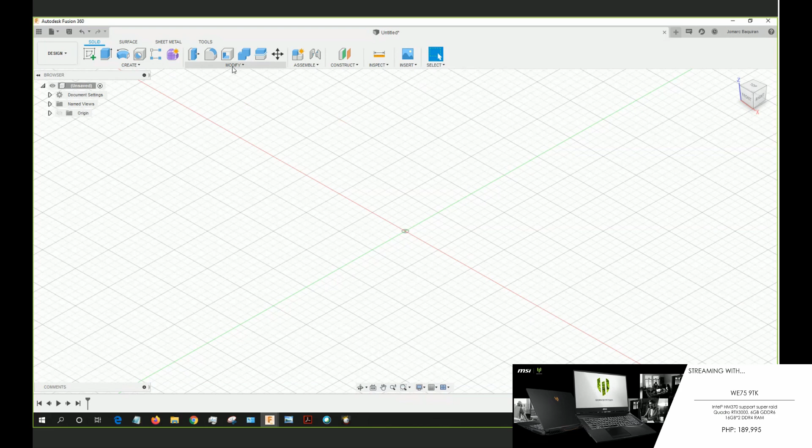You can easily 3D print items. We have a lot of users making products for our frontliners. We want you to level up and use your knowledge in Fusion 360 to create something sustainable and helpful. Later we'll show you the works of our designers who created products for frontliners - someone made a mask filter.

Without further ado, let me open up Fusion 360. In comparison to AutoCAD and other CAD packages, Fusion 360 is very easy to learn.

Ms. Nelsie, can you show them - let's start off by creating a simple sketch and discover how to navigate Fusion 360. Can you create a quick box by selecting R? Let's create a quick rectangle - R, the shortcut for rectangle is R. Can you extrude that quickly for me? That's it - in a matter of seconds, we have created a 3D model.

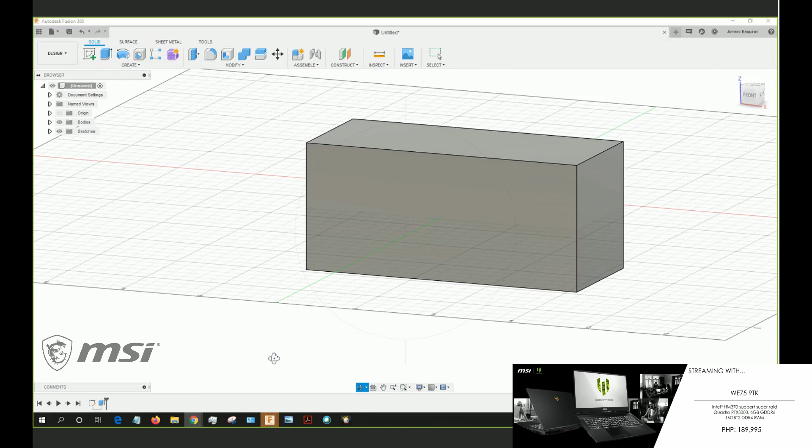Okay, how about orbiting? At the bottom of the screen you can see some commands there, but most important is speeding up your workflow using the shortcut command. So what's the keyboard shortcut for rotating a model or orbiting, Ms. Nelsie? It's holding Shift and your middle mouse to orbit.

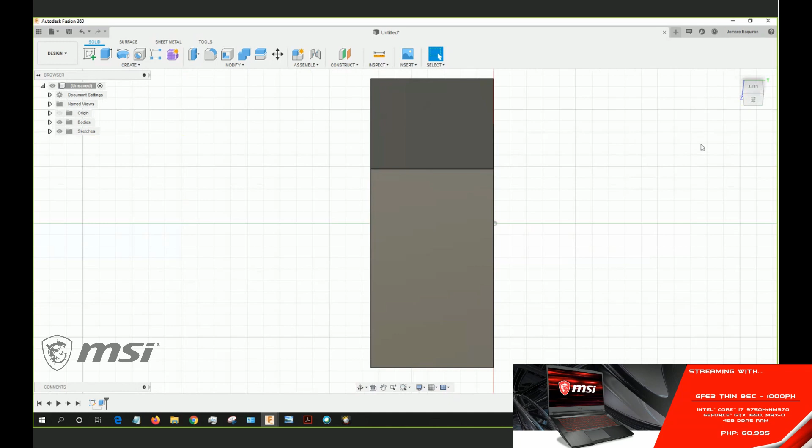So for example, can you zoom out, make the model very small, far from our view? To bring it back, you can select home view, and also you can zoom to extents by clicking your middle mouse twice. Double click your middle mouse to zoom extend.

Again, if you're familiar with AutoCAD, it's very much the same. So the navigation is very much the same with AutoCAD.

In addition, Fusion 360 you can also import, you can also reuse the DXF and DWG files from AutoCAD. So nothing is wasted. If you would like to migrate from AutoCAD going to Fusion 360, it's very easy. We're hoping later we can demonstrate how to bring in a DXF or DWG file.

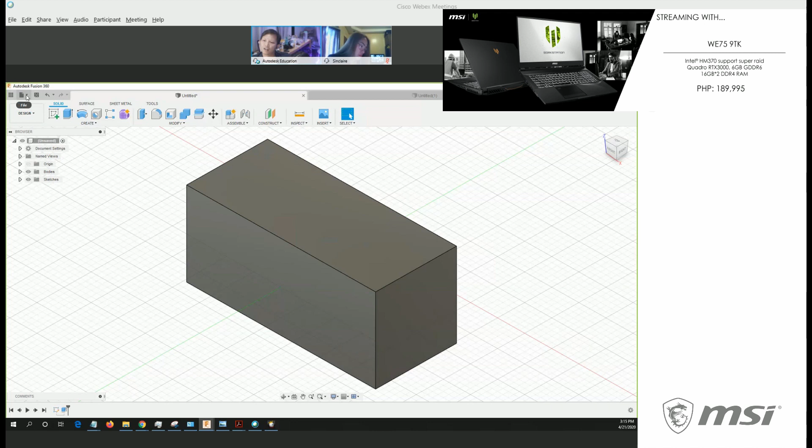So again, if I save this file, can you hit save or show them? Let me show you the data panel. This is where the version of our Windows Explorer in Fusion 360 is. So the data panel is the one that looks like a Rubik's Cube.

Okay, so notice as Ms. Nelsie hits Control S, let's name this as MSI-01. And I have already defined my target folder, or I can create a new folder. So let's create a new one, Ms. Nelsie, or head out.

So I can select cancel, go to home. This is one of the best practices of getting organized. Make it a habit to create your own new project. All of the items or folders you are seeing here, I can also access via my tablet or my mobile phone.

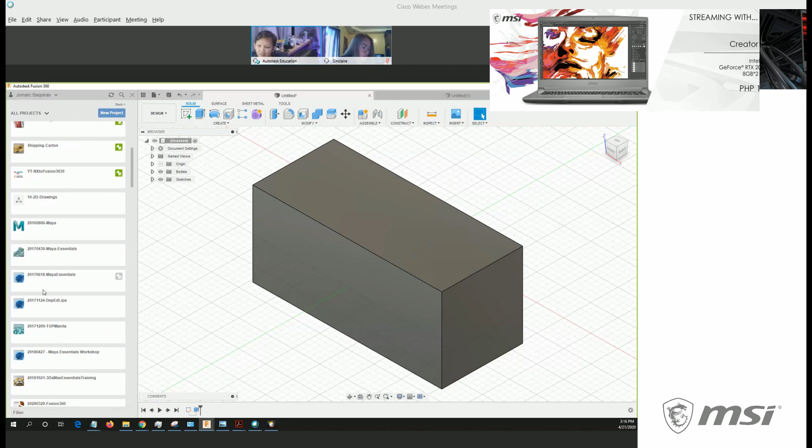That's one of the advantages of being connected with the cloud. So I have here many folders. Let's create our new folder. I'm going to select new project and name this MSI Philippines. Hit enter, and let's double left click on that folder, MSI Philippines, to enter.

In addition, I can work quickly with someone. For example, if we're planning to create a car or a vehicle, I can invite people. Under people, that's the gear icon. If I know your email and want you to join our new project, for example we're about to create a car, I can invite you here.

And we can collaborate together quickly. For example, I am assigned to create the wheels, you were assigned to create the body of the car, and another teammate is assigned to create the engine. That's one of the powerful things in terms of collaboration in Fusion 360. So you're not working in silos, you're working as a team, and it's very easy to invite everyone.

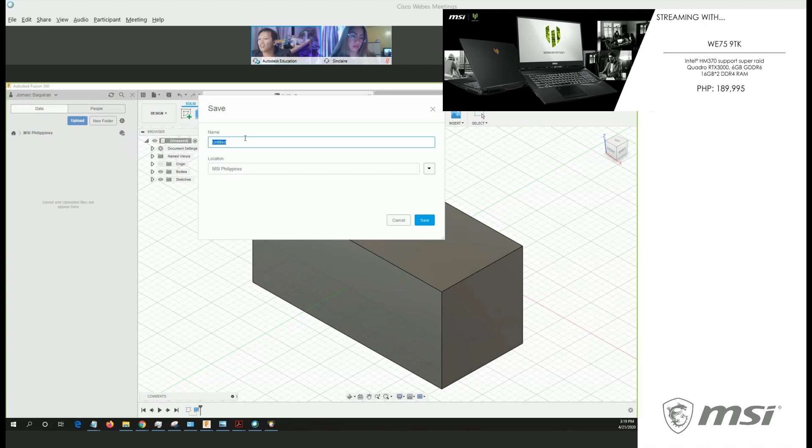Anyways, let's name that 01. Saving this, notice on our data panel. There, it updated on the left under MSI Philippines. There's the awesome rectangular block we made. Again, I can access that via the web, just in case I don't have Fusion 360 natively installed in my computer. So Fusion 360 is a very powerful tool. Let's hide the data panel. Shout out to Ms. Sinclaire, and hi to her baby.

Under design, workspace design, we have generative, just hover over it. This is one of the powerful features of generative design. Autodesk popularized generative design and they were the first, and everyone is following along.

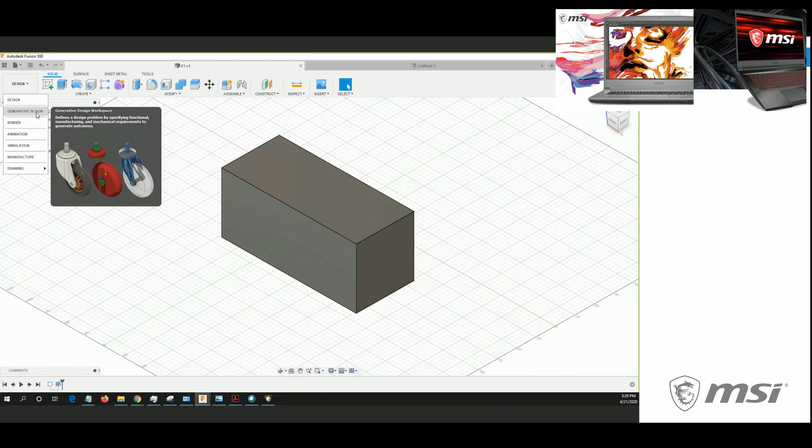With generative design, it's about harnessing the power of the cloud. As you can see here, the wheel of the cart, on the right side with generative design you will assign the stress points, and then automatically the power of the cloud, the servers, and Autodesk AI will quickly create a new model for you, taking into account the important stress points.

In addition, later under render, when you're using Fusion 360, you won't even need to use V-Ray. Later we'll show you the power of rendering, and the native render of Fusion 360 is also great.

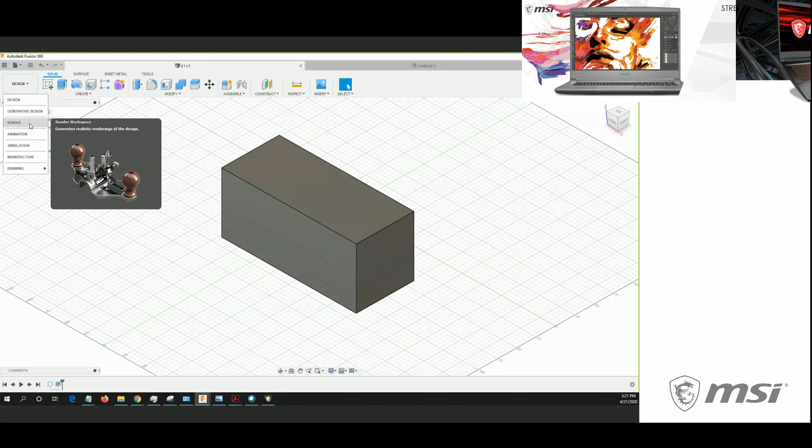In addition, you have two options. I can use the local processing power of my MSI laptop or desktop to render it locally. And again, because it's connected to the cloud, if your laptop or desktop is old and can't handle rendering something great, I can throw it to the cloud and Autodesk servers will make the render for you.

Moving forward, we have animation. So again, if you're planning to instruct the manufacturing side or the factories how to assemble your product, you can create animation.

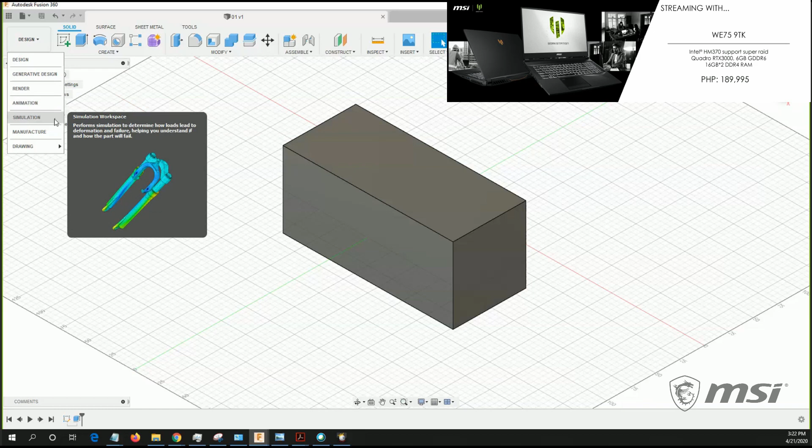Unlike other CAD packages where you have to purchase separately the simulation packages or the CAM, let's select simulation. Unlike SketchUp, in comparison to our users there, I can create simulation studies.

So here we're seeing static stress, modal frequencies. If you're into electronics design, Arduino, we can have electronics cooling simulation, and thermal too. It's multi-physics, it doesn't solve just one thing. It can also do thermal stress. And for our civil engineer colleagues, structural, we can also simulate structural buckling.

Okay, nonlinear static stress event simulation, and kung gusto natin i-optimize yung isang product natin, diba? Kunyari, drone yan. Gusto mong, ano ba yung purpose ng having a drone? Lightweight. We can optimize the shape of your drone, making it lightweight.

Again, using the power and connectivity of Fusion 360 with the cloud. So I'm going to hit cancel. Okay, and in addition, if you want to level up, hindi lang 3D printer na ang hinahangad mo ngayon. You wanted to create something like, for example, an engine block.

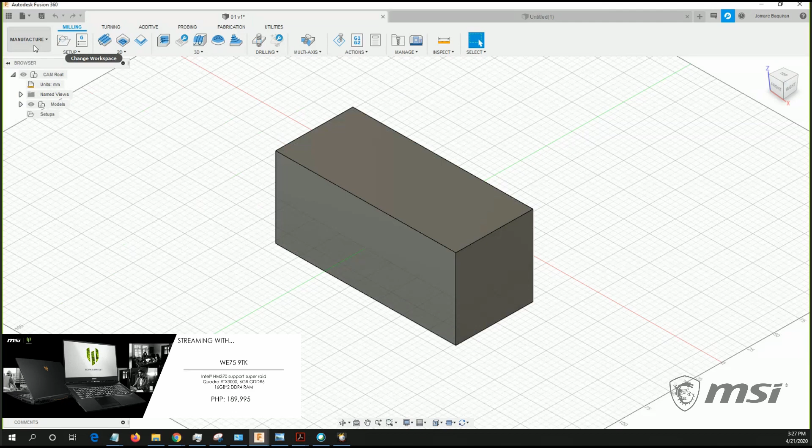Okay, so I want you to take note of the workspace you are in. So let's get back to design.

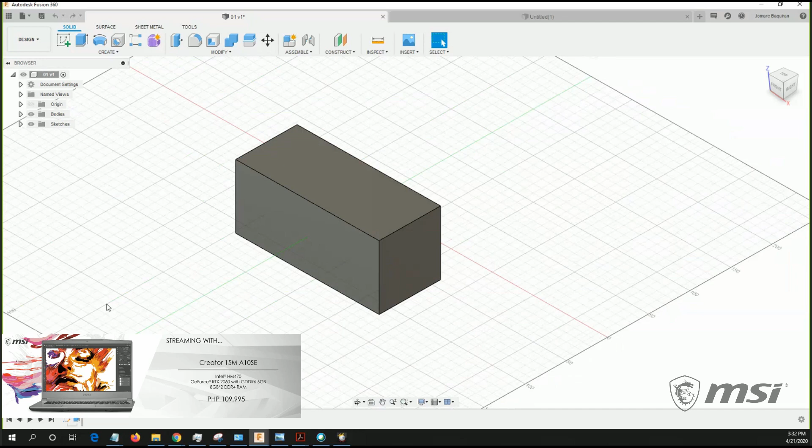So for example, you're into automotive. Again, the flow is initially an artist draws the car, and then it will be transferred into CAD 3D. Same din with our buildings, so ginagawan muna siya ng 2D. That's also the same flow when you're in Fusion 360. So again, you are firstly required to sketch. That's of course.

So moving forward, to begin creating something in 3D it is very essential to have a sketch. Here on my upper left, you're seeing 'create a sketch.' I'm going to select this, left click to create sketch, and notice beside my cursor, it asks for select a plane or a planar face.

For our young ones there, let me give you an example. We have a partner somewhere in Ayala, Alabang, in grade 9 pa lang. The students are learning Fusion 360. This is fun, and you can create lots of things, create toys, no?

So again, we are asked to create a plane or planar face. Think of it, initially you were given 3 papers to sketch on. The first paper I am pertaining to is the XZ plane, currently highlighted in white. Whenever I hover over that, it highlights in white. Same on the other side, it's YZ - let's call it the paper YZ. And this one, the paper of XY.

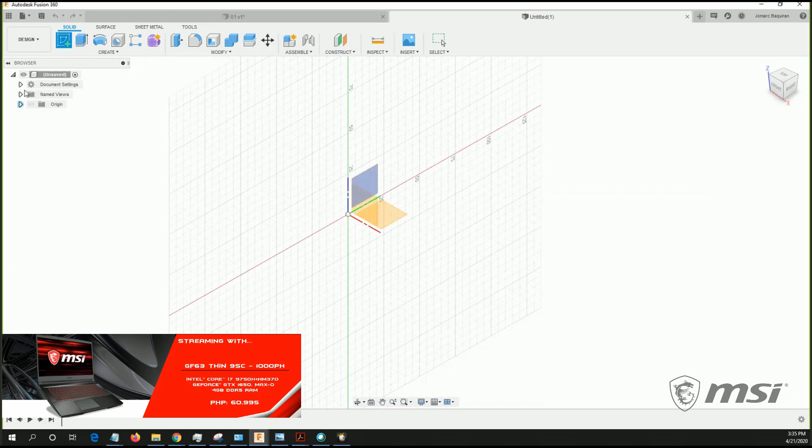And those items are stored under browser - here sa origin. That's the XY, YZ, XZ planes. So that's three. Okay?

So in this moment, let's sketch on the paper of XY. I have a visual cue kasi nag-highlight din yung XY dito. Notice, as I hover over XY, it highlights in blue. So confirmed, let's sketch on our XY plane.

If you're an AutoCAD user, you may have noticed or seen the constraints, and I guess I've seen a lot of Autodesk users not using the constraints. Well, in Fusion 360, it is very essential to master the constraints. Later on, I'll reinforce the importance of learning constraints. So before we create something, let's first discover the constraints.

I'm going to hit L, the shortcut for line - it's over here under create. I select line, left click here, and notice I have here 74.106 millimeter and then 24.3. Same with AutoCAD, I can cycle through by hitting tab. This time I left click to place my first point and left click again.

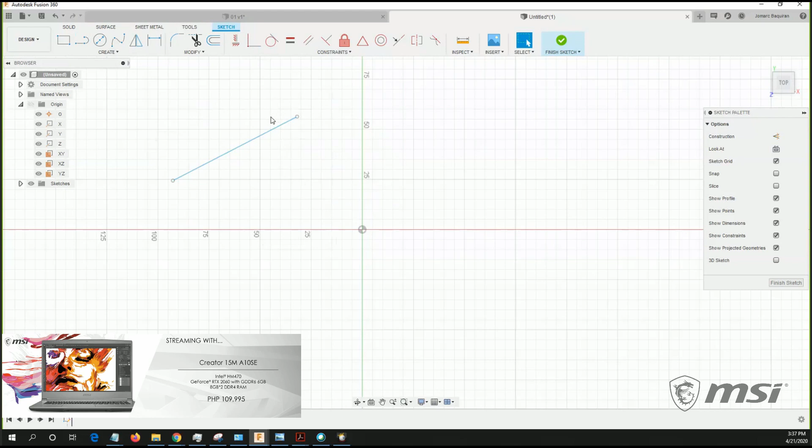So with that, I didn't commit to the suggested angle and values earlier. Our target is to discover horizontal, vertical - L again for line, left click to grab this. In addition, I can create a set of chain of lines by left clicking here, left click, left click, left click. If you want to disable and have just one line segment, I can simply hit L for line, left click, and double left click - so it's not a chain of lines anymore.

In addition, you can hover over any specific entity to move them. Hovering over, it highlights in blue. I can left click and hold - to move this line, I can grab its endpoint, the white dot, and resize this line. And I can delete.

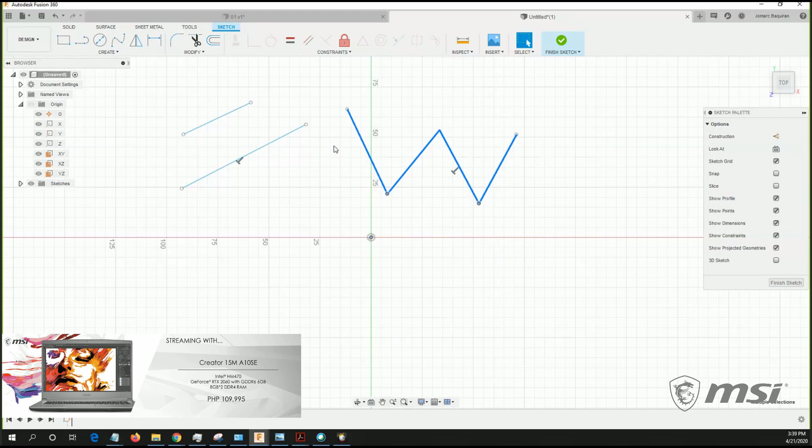Same with AutoCAD, I can create in Inventor - shout out to Mark Dolendo using Inventor. I can create a window selection, same thing with AutoCAD, coming from right to left - crossing window selection. Let's delete this series of lines using crossing window selection, left click and hold, release. With crossing, everything it touches gets selected, not necessarily inside our window.

So that, hit delete. Same here, let's try window, the plain window selection - delete. So again, discovering horizontal, vertical, left click again. To select horizontal, vertical, left click here and double left click. Feel free to follow along.

Notice this line is leaning more towards horizontal position, and this slanted line is leaning towards vertical position. When I select horizontal, vertical, I see the icon beside my cursor. As I select this, hovering over turns it blue, left click, same for this one, left click. Take note where it's leaning towards - that's where it will go. So this became horizontal, this became perfectly vertical. As I grab the endpoint to resize, this one is completely vertical and this one is completely horizontal.

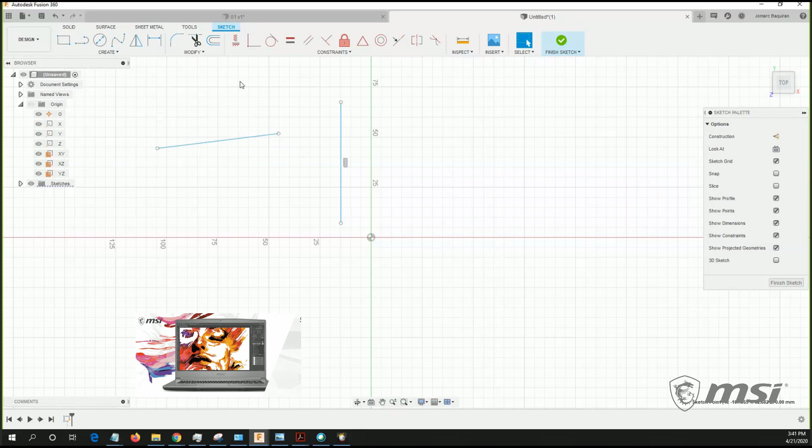You may have noticed an icon appeared here - that icon is the horizontal constraint, and this one is the vertical. In addition, if I no longer want it to be perfectly horizontal, I can hover over that constraint symbol - here, horizontal - select this or create a window selection and hit delete. Now I can move this again. Going back, selecting horizontal, making this perfectly horizontal.

So next, let's discover coincident. From the word itself, coincident, it simply means pinagdidikit niya - points or entities together. Let's say I want this endpoint and this endpoint connected. So I can select coincident, select this endpoint, and it goes to that endpoint. Notice again, as I drag this, they are both perfectly connected with each other. Okay, moving forward, we're done there.

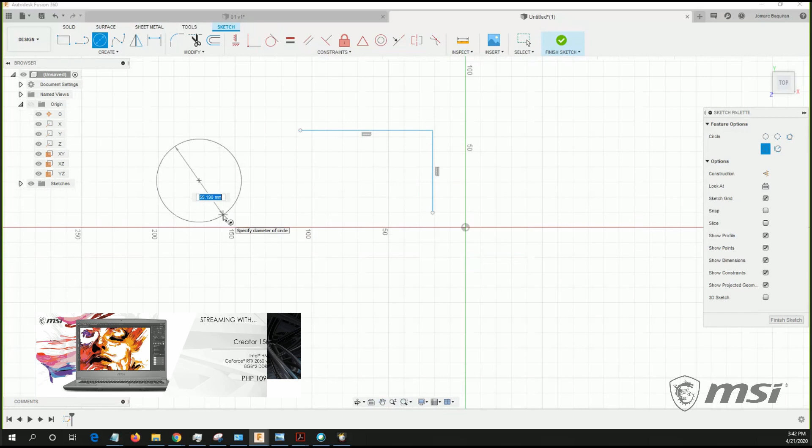Let's head over to tangent. But first, let's create a circle. The shortcut key for a circle is C. Hitting C on my keyboard, it's asking, place your center point. Let's have our center point here, left click. Again, I will not input any value - I won't mind this 55.198. Left click, again for practice, left click, left click. Hit escape.

Next, because I mentioned tangent, notice the effect, so that's why I'm encouraging everyone to follow along. Selecting tangent, I'm going to select the circumference of this circle, left click, and left click this line. Hit escape. Let's move this circle by hovering over its center point. Notice the effect as I move - our circle stays tangent, it doesn't go past that horizontal line.

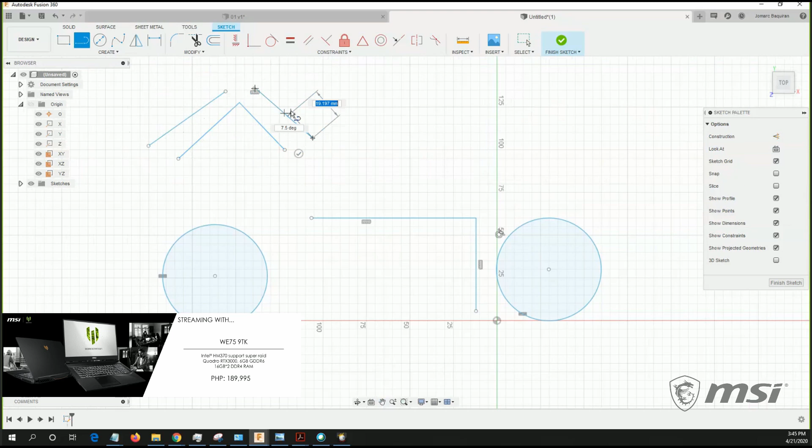Moving forward, parallel. For example, you're creating a roof. Let me create two lines here. Let me delete this one first, and this one. L, here's one, L here - say this is a roof, and later on I want to extrude it. So these are the possible applications of using the parallel constraint. I can select parallel, select this and this, and now there's the symbol for parallel.

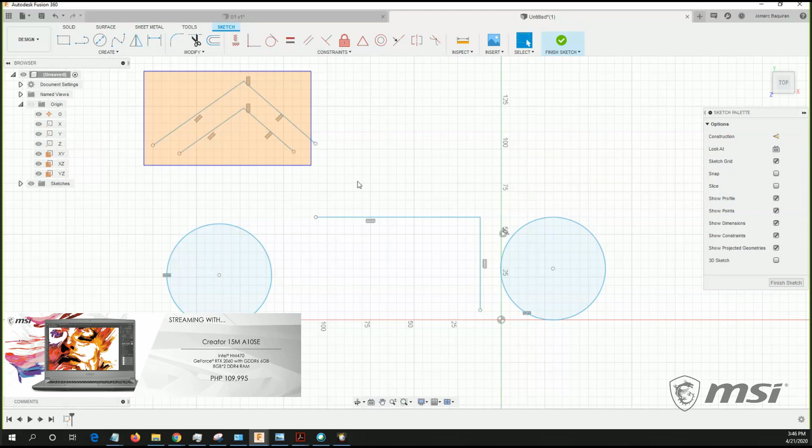Next, I'm going to delete this - is perpendicular. Let me ask, is this perpendicular? What's the angle here? Yes, it's 90. When you say perpendicular, it's having an angle of 90 because this one is perfectly horizontal and perfectly vertical, creating an angle of 90. It just happened this way - I want you to be aware that in this instance, we made these two lines perpendicular with each other without using the perpendicular constraint. But of course, I can delete this and select perpendicular, selecting this and this - there it is.

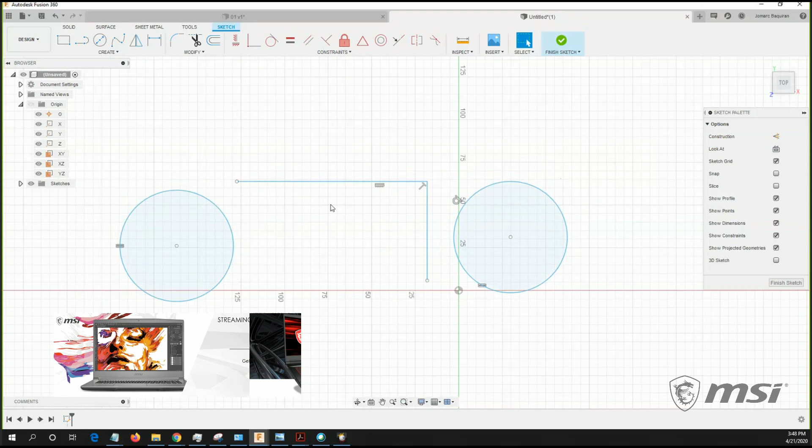I want you to be aware that when you're creating or sketching something, there are inferred constraints. It suggests something, like this line I created - notice the blue symbol indicating horizontal or vertical. That suggests a commit when I left click. So you're probably asking, what if we want to disable this? By holding control, you can disable these suggestions.

Same with AutoCAD, you may be having snap track. Notice, I hovered over this endpoint and moved to the right - there's a blue dashed line, meaning it's a snap track. I can disable that by holding control. So holding control disables snap track and inferred constraints.

Pusuan yan. So moving forward,

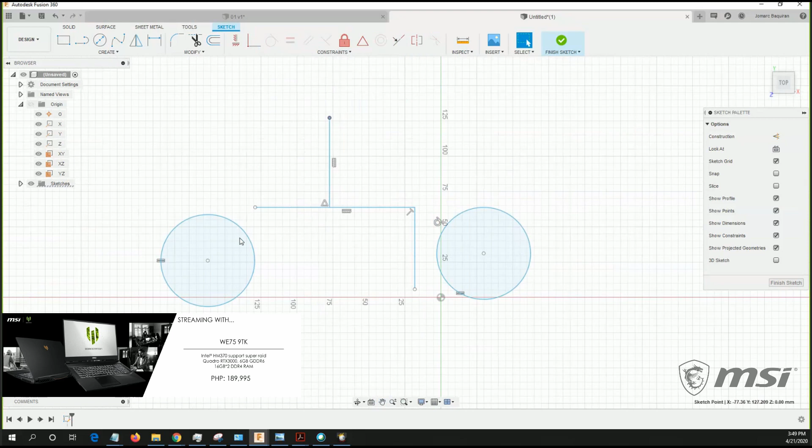Moving forward, midpoint. For example, let's create a line here. I want this endpoint of this vertical line to be exactly at the midpoint of this line. Midpoint requires you to select a point and a line - this point and this line. Now it's at the center of this horizontal line. Selecting this line, then deleting this.

Moving forward, collinear. From the word itself, having two lines - collinear means they're lying on the same plane. Notice the effect. Let's select collinear. Select this, then select this.

For our engineers, or if you have a son or a daughter, this is also a perfect bonding activity - bonding with them, create shapes, figures, toys, and have it 3D printed together with your child. In a way, without them knowing, you're influencing them to engineering. This Fusion 360 is a great tool also for us to influence the young ones to take up STEM-related professions in the future. But it's not just STEM - art is also very important. If the look of your car isn't good, it won't sell. That's the importance of art.

Going back, it's collinear now - that's the effect. Notice as I move this line, this line and that one, they are both lying on the same virtual plane. I'm going to delete this. I hope you're following along.

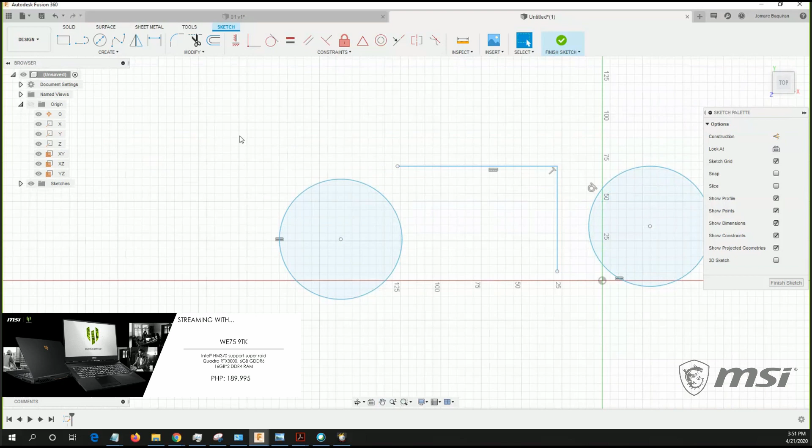Symmetry, we'll discover that later. And this one, curvature - it's simply, curvature and fix/unfix, we seldom use this unless it's really needed.

But to demonstrate, if you're curious, I'm going to select spline and create another spline here. I can have these lines - let's make them coincident first. There, let them join. I can have these two splines have a smooth transition between them. There, it's smooth now. That's the use of curvature.

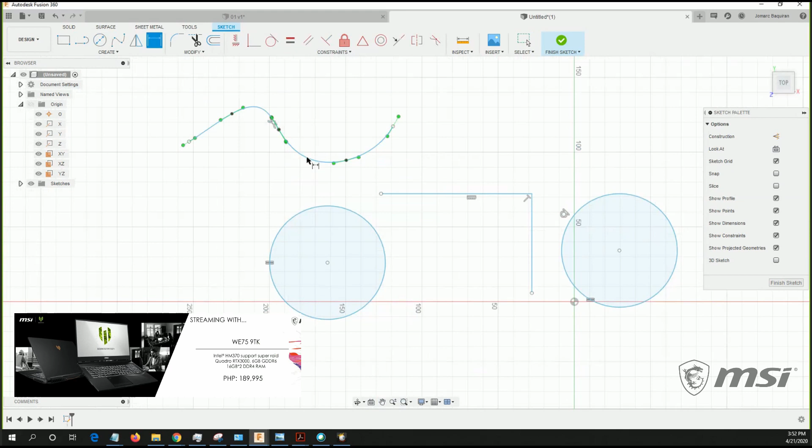Again, this is seldom used unless you require it for your designs. The thing about splines is you can't define them well as a dimension - the only thing you can dimension on it is points.

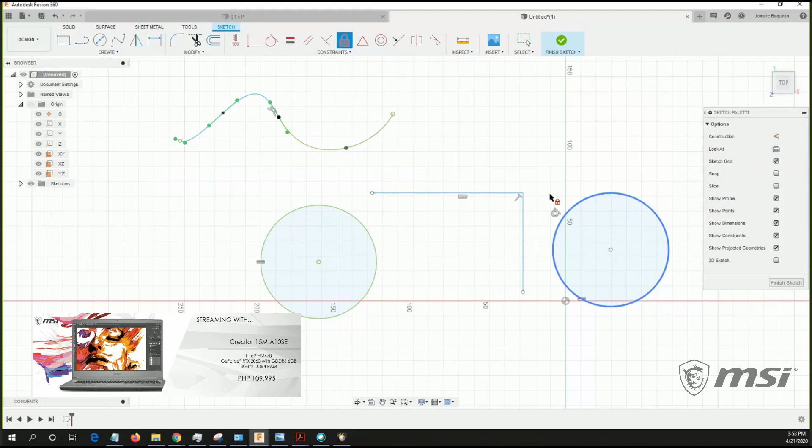And going back, fix - fix is simply, notice I can move this spline, but if I select fix and select this, it turns green. Whenever it's green, it's an indication it's being fixed. As I hover over this and attempt to move the spline, it won't move anymore.

Same thing - if I apply that to the rest of my sketch entities, they won't move anymore. Again, it depends on the purpose or your design intent. To remove it from being fixed, select fix again to unfix. Let me delete these two splines by hitting delete on my keyboard.

This is one of the things our first-timers sometimes get confused about. Yes, Sir Crisostomo, always level up - not just in gaming level up. If you think your gaming earns money for you, go for it. But make it also one of our advocacies, make it a habit to always level up, learn something new. You can be a freelance designer using Fusion, have clients internationally, earning dollars creating 3D models.

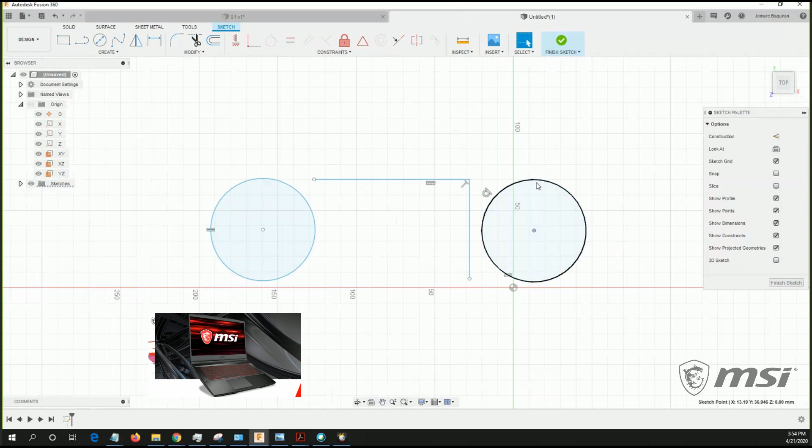So moving forward. Yes, Sir Ira? Okay, moving forward, our next intent is this circle - let's make it coincident. Selecting coincident, there, and this point.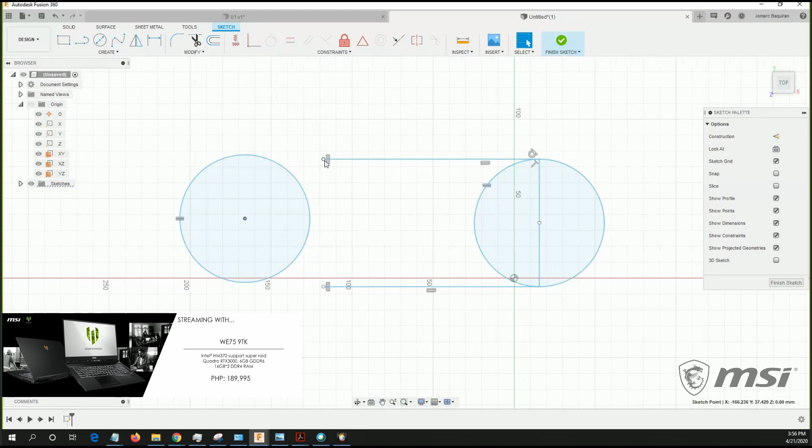Next, we want to connect this circle of ours to this endpoint. Again, coincident, whenever we're sticking things together. Selecting them both, this circle and this endpoint.

Right, also make it a habit to move your entities to check, because from there, if you're moving an entity, it will give you an idea if your sketch is lacking a constraint or a dimension. So here, I'm seeing that this also needs a tangent because it's going past.

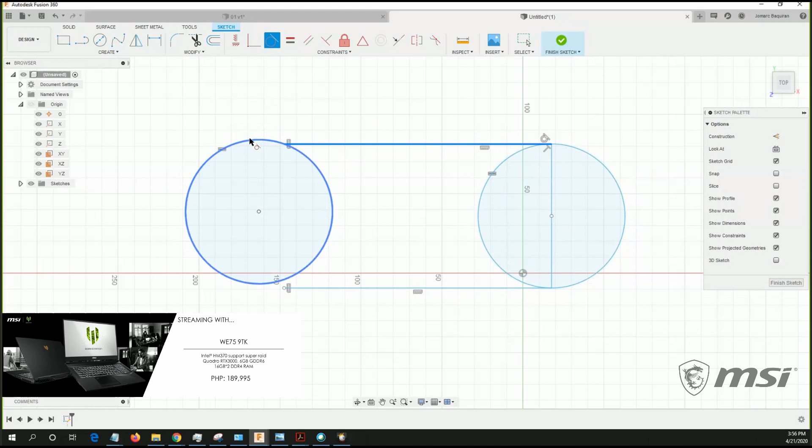It's not creating a smooth transition, so selecting tangent and the circle. Okay.

So inspecting, moving them. Let's create another 2 circles here. Next, I haven't discussed concentric yet.

Concentric aligns the center points of circles. So here, I want this to be here. Although I can move and drag it, I can select concentric, selecting the mother one and then the child one.

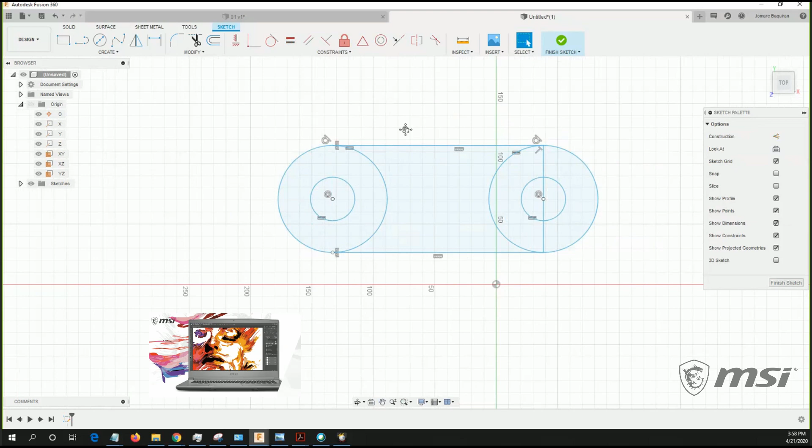So make it a habit always to place your sketch at the center or middle of your sketch entity. This happened to be symmetrical, right, on this side and this side, it works. This platform is Fusion 360. Notice its center, right? This is probably the center, the center of gravity and mass here.

So make it a habit, best habits, to place the origin at the center of your geometry or sketch. Where is our 0, 0, 0 now? Here it is, and as I hover over this, our 0 here, it highlights white.

So we need to bring this whole sketch here. To place this exactly, one trick is I'm going to create a line from here going here.

And I'm going to select midpoint. Again, midpoint requires a point, so selecting this line and this point. Okay, and now it's centered.

So notice as I select these entities and move them, our origin is centered now.

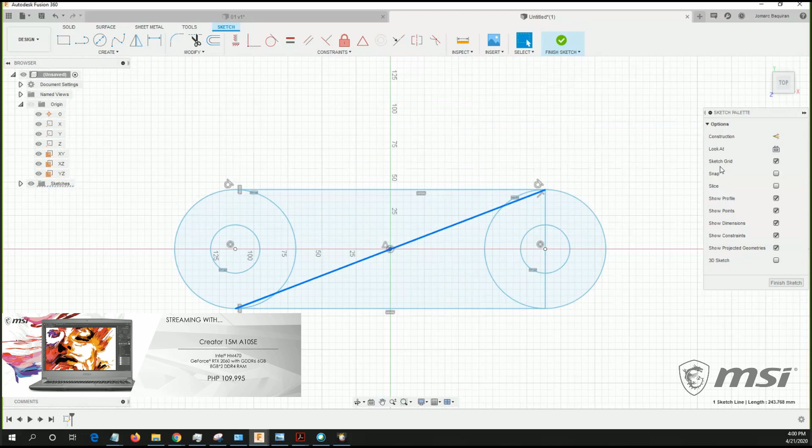Okay, moving forward, notice this line, we just used it to aid us in centering our sketch. So if this is the case, I can select this, and since it's not important as a profile, I can select this and head to options and select construction.

Notice, it changed, and earlier I'm going to hit undo. In AutoCAD, before we extrude something, we create regions. So here, we have several regions.

1, 2, it highlights in white, 3, 4, 5, 6, 7, 8, 9, 10. So notice, when we make it construction, we reduce the profiles.

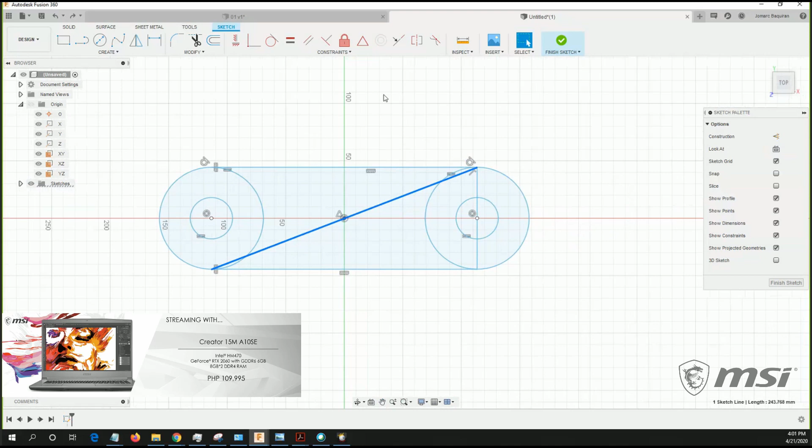So in AutoCAD it's called region, in Fusion 360 it's profile. So selecting construction, selecting this vertical line, let's have this as construction as well.

In addition, instead of going to the sketch palette, we can save time by right-clicking, and is it here? There, I can select normal construction. Again, the shortcut key is letter X, so with this vertical line selected, I can hit X. So our profiles have been reduced.

Okay, so inspecting, let's now define it. It's still moving, right? So from the word itself, when you say constraint, imagine if you're constrained with handcuffs, you can't move. So that's the essence of these constraints, its degrees of freedom should be removed.

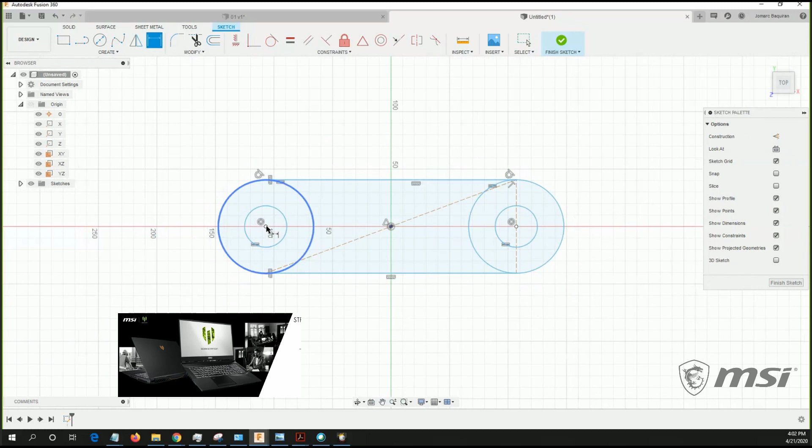So let's define the dimensions. Hit D, there, it's here too. Again, D for dimension. Let's define the distance between these center points. Select this, that's the center point, white, left click, blue now, take note, left click again here.

Okay, so nakadalawang left click na ako. Gusto kong ilagay siya banda dito para neat ang dating. Left click dito, i-in natin, 200. Ayan, next. Ito naman, siguro let's have this at 80.

Yan. Oh, notice, diba kanina ito mga items na to, blue. Now it's black.

Okay, so again, later we'll be creating this Pokemon ball, mabilisan, to show you the power of Fusion 360 and its rendering capability. So again, napakahalaga po nito, no, when you're starting out in learning Fusion 360.

So again, iba na siya, no, black. And notice as I'm trying to force this to move, hindi na. So again, that's a good indication that we are right on the bucket. Diba? Pag itim siya, it's fully constrained. So same dito. Ayan, di siya gumagalaw.

So let's define this, hitting D, by selecting the circle. And ano ba, let's have this at 40. Hit enter. So dahil equal sila, look at that intelligence, no? Sa kabila, nag-update din. Okay?

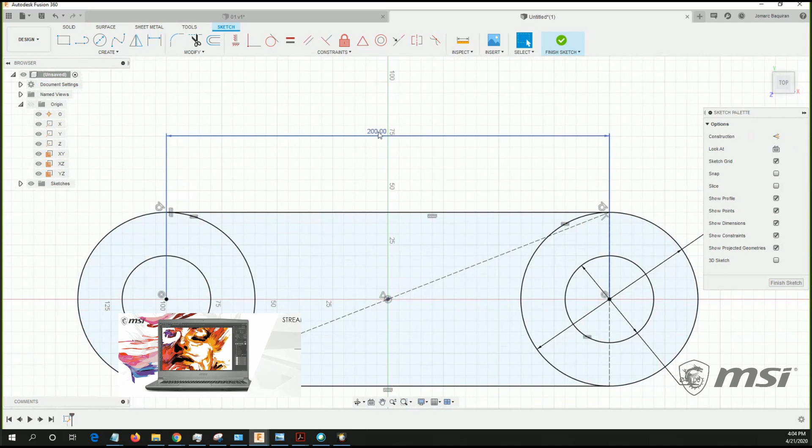So in addition, no, you can also, let's say nagbago isip mo or your design manager, sabi niya 150 lang dapat yan. I can head over to your target dimension, double left click, 150. Ayan, so this is an indication na itim na sila lahat, no?

And from there, we can now make this into 3D. Okay? So before I hit finish sketch, hindi ko nasabi si symmetry. Let me share symmetry to you.

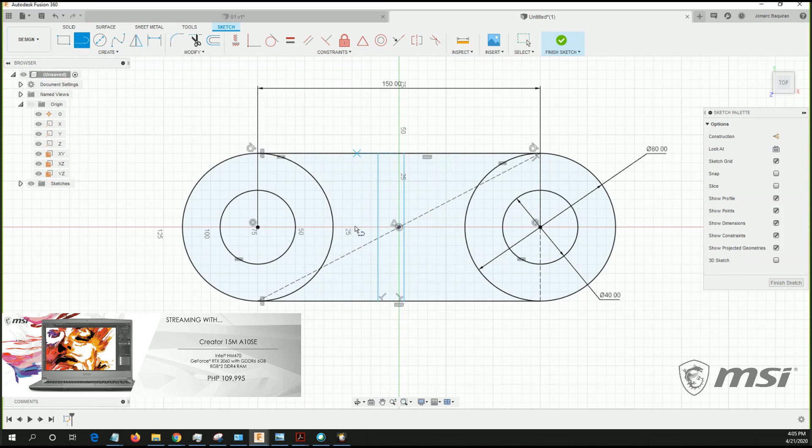So I'm going to hit L, diba, create a line from here going here, from here going here, from here going here. Next, so i-move natin to, ilagay natin somewhere here. Again, I want this line, diba, midpoint sa ating origin. So again, it's midpoint, selecting this point and this vertical line. And ito na po yung this one.

Next, symmetry. So for symmetry, what you should always remember or take into account is selecting the symmetry line last. Siya dapat yung huling-huli mong isa-select. So selecting symmetry, ito dapat symmetrical at saka ito, diba? Symmetrical silang dalawa with respect to dito. So again, huling-huli dapat yung parang mirror or symmetry line nila.

So selecting this, ayan, so tingnan nyo yung effect. Notice the effect of symmetry. As I move this, diba, perfectly symmetrical din sila. The distance between this line and this line, diba, ay pareho. So I can define this side, or eto na lang dalawa.

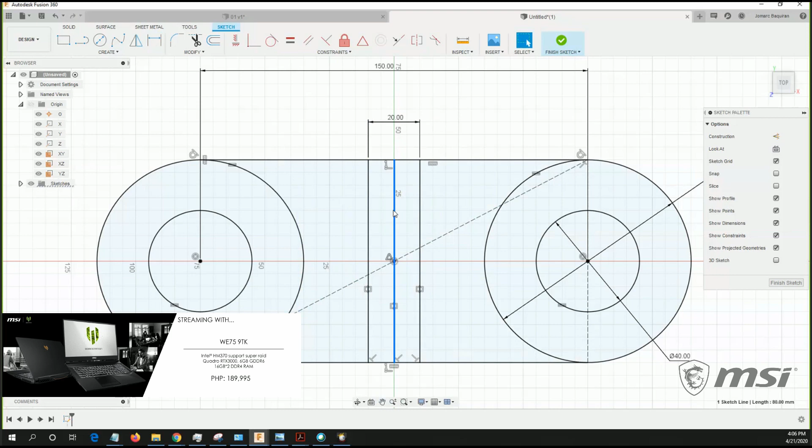Let's say 20. Yan, eto, helper lang naman din to, construction entity, di ba? Again, the shortcut is instead of going here, hitting X. Okay, so yan, again no, I can now select finish sketch and gawin na nating 3D to. Okay, so if you're familiar, just a matter of seconds, we can create now a 3D model.

Yes, Sir Ira? Ayan, so sinelect ko na yung finished sketch, di ba? At pumunta tayo sa bahay. Let's just call this bahay ni Kuya.

Okay, so notice din at the bottom, nag-register siya. So ito yung one of the cool things about Fusion, it's non-destructive. Yung ginagawa natin are series of events linked together. So alimutan ko yung term sa computer programming na smooth yung pagsusulat mo ng codes. Ayun, semantic.

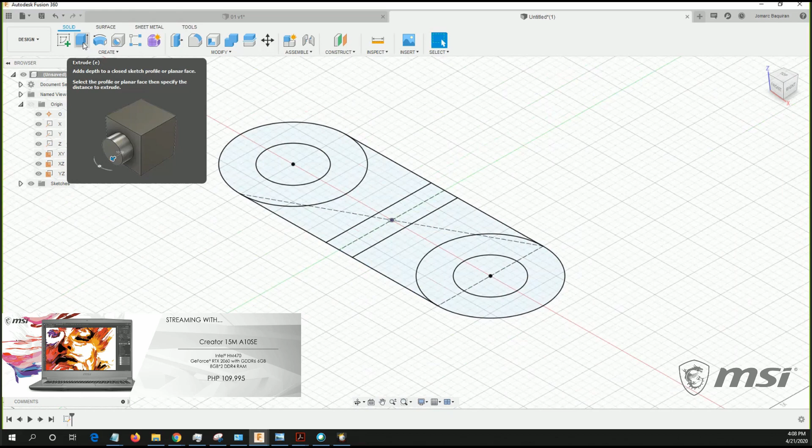So again, itong feature, they call this a feature, nag-register yan dito. Okay, so gawin na natin 3D to, heading up to extrude. Okay, so it asks for a profile, diba, or region in AutoCAD. So for now, I'm going to have a window selection, so na-select ko siya lahat.

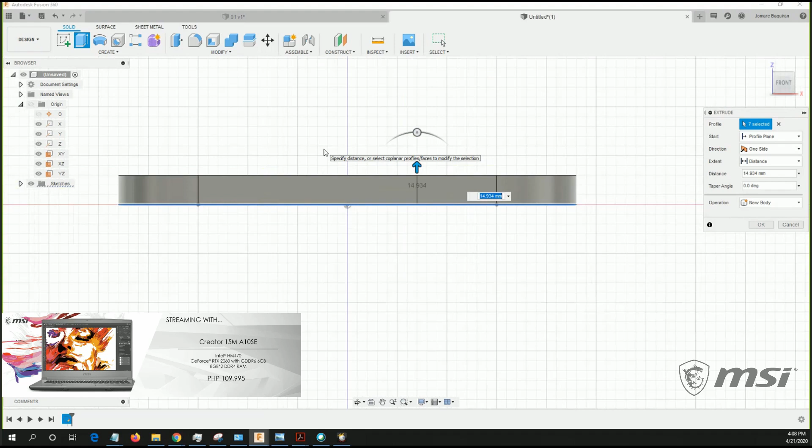In addition, di ba, let's pull this first. Ayan, so meron na siyang height. Di ba kanina I've mentioned about making things symmetrical and centered. If I extrude this up, notice our origin, di ba, ay nandito, in which it is highly recommended na dapat nandito at the middle center.

So to do that, we need to change the direction to symmetric. Okay, so notice, with respect to our origin, diba, centered na siya. It's coming from the center going up. And because we're making it a habit of centering things, diba, in the future it's a benefit for us, diba, kasi we can mirror things instead of recreating some things, diba. Pwede natin siya mirror, so we have saved another milliseconds.

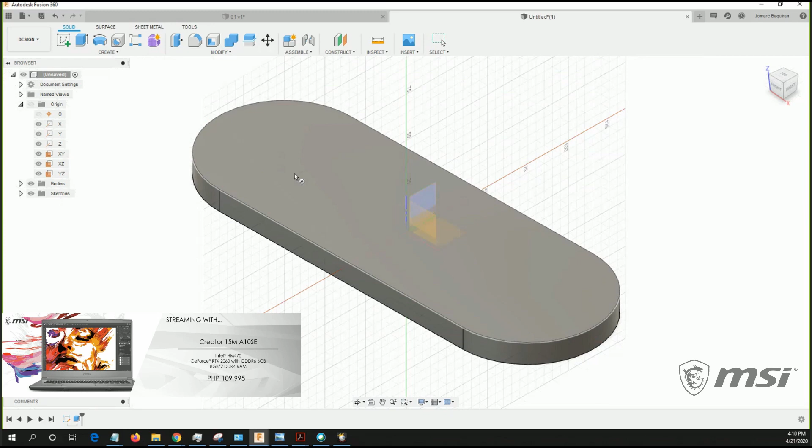Okay, let's have this at 6 na lang. Okay, so operation new body. Yan, ayan, so meron na tayo. In addition, instead of creating another sketch, di ba, mag-create tayo ng circle na naman dito, di ba, para lang butasan to.

Notice kanina, nag-create na tayo ng sketch doon. Whenever you create a feature like extrude or revolve, it consumes the sketch. Nawala yung sketch pero di na actually nawala, nandito lang siya. Ito yung sketch natin kanina.

I'm going to hover over here, hold control, select ko itong dalawa, hit delete. Ayan, nawala na. At meron na tayong sketch na ginawa recently, so I can reuse this instead of creating another sketch. I'm going to hit E.

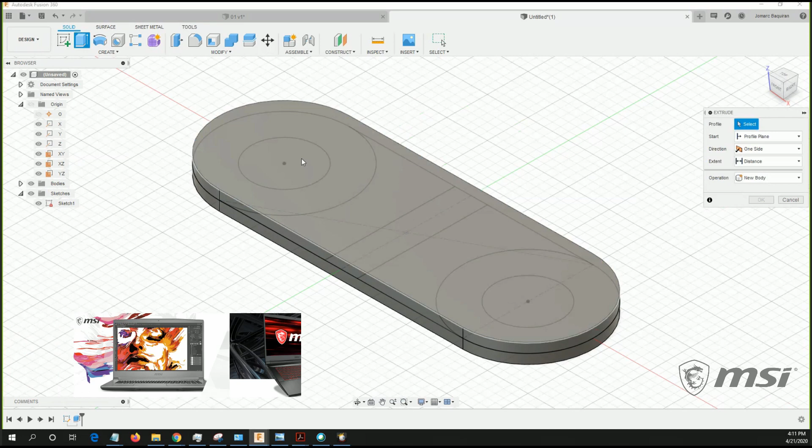It asks me for a profile. Pag sinelect ko to, this face, it's highlighting in white. It means pag I make a left-click gesture, ito masa-select. Pero target natin yung nasa gitna. So kung ganun, hover over your target entity or profile, hold control.

Once more, hold control and this dropdown will appear. Ay, hindi pala hold control, hold my left mouse button. Hover dito, ito yung target natin, left mouse button na matagal, lalabas yan.

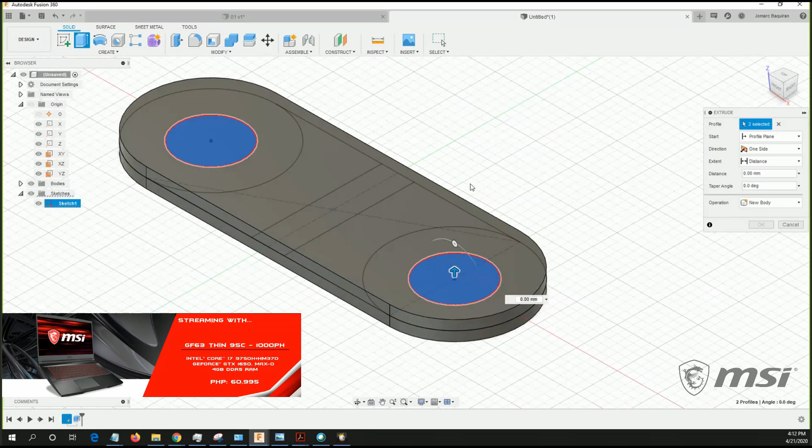So again, ito yung face, yung profile, tsaka yung ilalim na face, lahat sila nandun sa line of vision ng ating cursor. Because it's profile, selecting this, hovering over here, left click and hold, selecting profile. Let's pull this up. When it's in the color of red, it's a cut operation. Kanina parang join yon or new body pala, so I want you to be aware of that difference.

Once more, selecting two sides, pwedeng two sides or symmetric din. I can select all, meaning lahat, tagus-tagusan. Ito rin, all, okay, and then cut. So nag-create tayo ng another feature, kaya lang it's a cut extrusion using a single sketch.

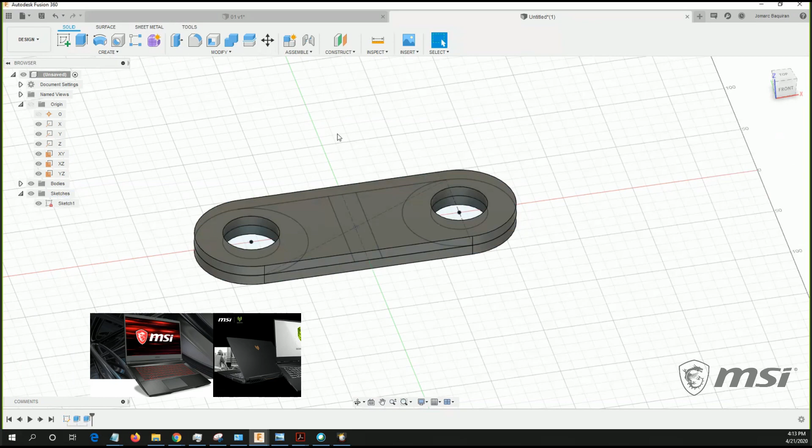This is a great time to discover how we can use DXF or DWG. Let me head over to our sketch. I can go back to any of these recorded features and make edits, for example gusto natin pala ito 8. I can double left click extrude 1, lalabas ng edit feature, select OK. For those using AutoCAD, I can head to Sketch 1, double left click to enter, or right click selecting Edit Sketch.

I can select Save as DXF, pwede kong dalhin yan sa AutoCAD, itong sketch na ginawa natin. Same din, if you're using AutoCAD you want your files to be imported. Yes, Fusion 360 is very user-friendly, kaya maraming kids marunong din ito.

Saan ba yun? Again, under Insert, if ever I have a floor plan made in AutoCAD, I can have this inserted as DXF. Import ko, lalabas na siya dyan. Pag lumabas na siya, I can also turn on and off the specific layers, thus I can assign constraints, dimensions, and extrude. That's the power of Fusion 360. Selecting Finish Sketch once more, and let's turn this off.

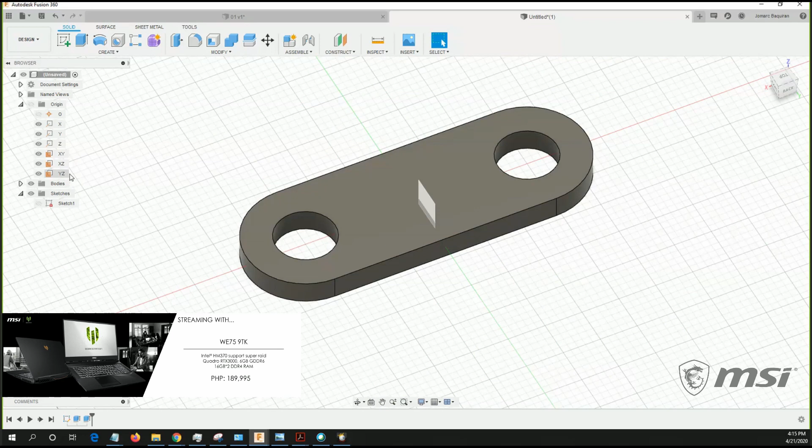Okay, so let's make things more interesting. Let's finish this up by creating this Pokemon ball. Pero bago natin gawin yan, this is now the great time for our MSI's message. Take it away, Sir Ira.

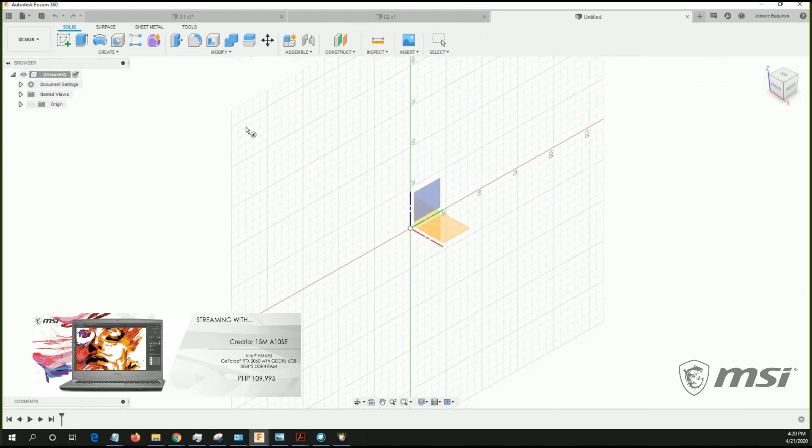Okay, let's create a new design. Instead of hitting Control-N, I'm going to select New Design. Let's try to recreate the Pokemon ball. Again, we create a sketch first, so I'm going to hit C. Instead of selecting Create Sketch, I can go into sketch mode directly by hitting C, L, R - line, rectangle. So hitting C for circle.

Where's a good place to sketch? How about the X-Z plane? Okay, selecting this, we're prompted to place our center point. Let's say this one is 100 in diameter.

I make it a habit, if it's something for the real world, to always have a ruler or a caliper with me. So in real life, this one is 100, about this big. Let's be neat - let's move this here so it looks good.

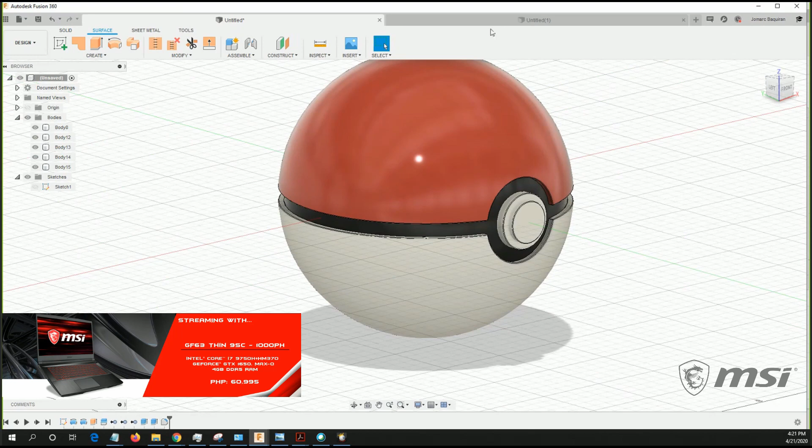I notice in our Pokemon ball reference there's this black thing inside, like an inner part. So let's create 2 circles - this one will define the outer shell. If this one is 100, let's make this 105.

Remember the Pokemon ball has a circle here too. Let's sketch that as well, so there's one big one - maybe 35. Okay, hit C again.

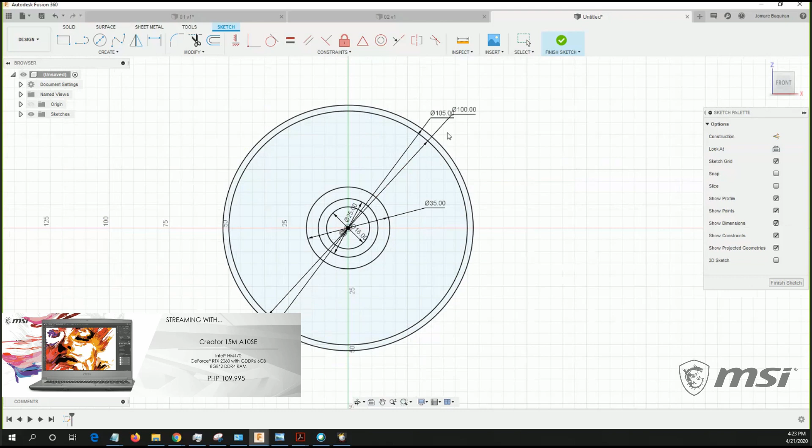Let's get things organized - I'll move the outer dimension here. In addition, the dimensions in our sketches have a big relation to our final drawing. If you want this drawing to work, it has a strong relation - it's almost exactly that. So take this into account whenever you're dimensioning.

We will be utilizing the revolve command instead of extrude. With revolve, it requires an axis, so what we'll do is revolve half of this circle - the half portion.

So let me grab the line tool. Placing this, I can place it anywhere, and I can use constraints. Again, I want this to be in the center, so let's grab midpoint, select this line, and our origin - it snapped right there. Again, we could delete it.

Let's create a new one - midpoint, selecting midpoint here, and our origin. Okay, so inspecting my Pokemon reference, let's first work on the inner part.

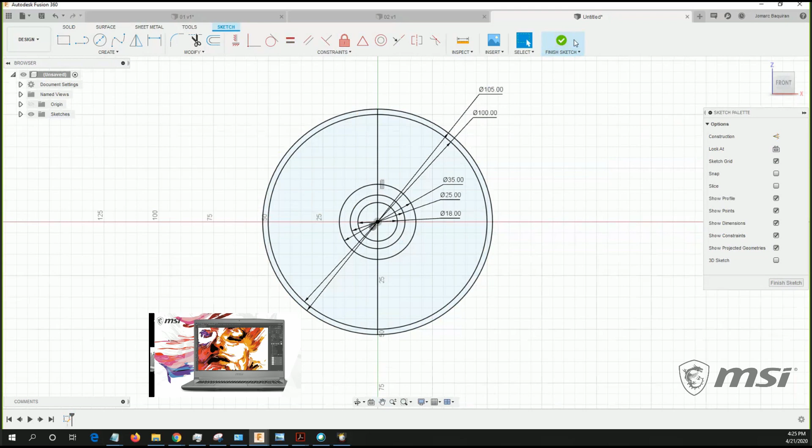From here, I can select R, E, V and choose Revolve, going directly to it instead of selecting Finish Sketch first. Your visual cue for being in sketch mode is this green check mark and button. So S for sketch shortcuts, then R, E, V.

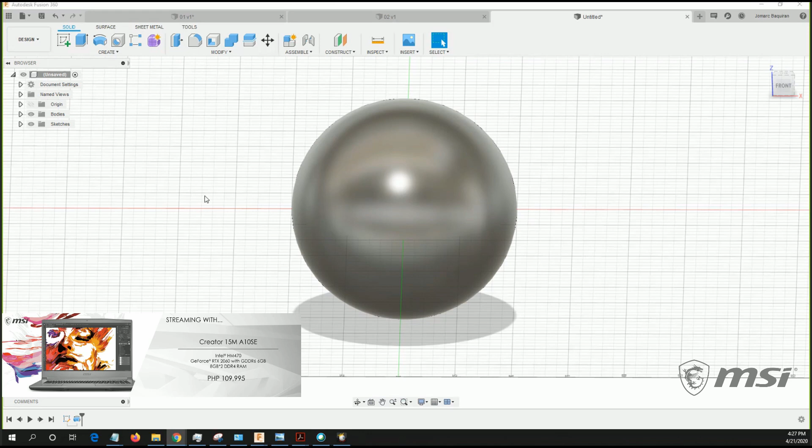My intent here is to revolve the outer shell of our Pokemon ball. Notice it has a gap here, on both sides. So instead of revolving directly, I can quickly go back in time to edit or revise my sketch. Heading to sketch 1, right click with sketch 1 selected, I can right click and select edit sketch.

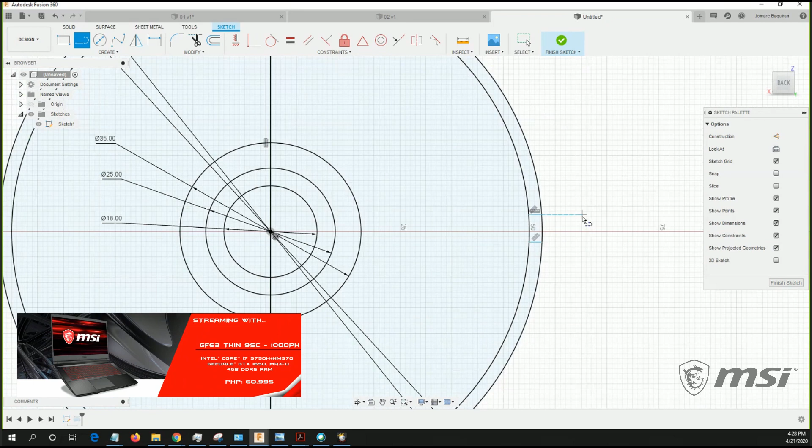Let's make the gap here. Using Line. Is this a profile already? Yes. When I hover over this, it highlights.

I want this perfectly symmetrical with respect to our x-axis, so I'll make a construction line, coming from our origin, going here. Take note that this construction is horizontal, it has a constraint, hitting X. Next, I'm going to have two lines, two horizontal lines.

Symmetrical, so let's try selecting symmetry, then select the outer lines and lastly the symmetry line. Notice the symmetry applied.

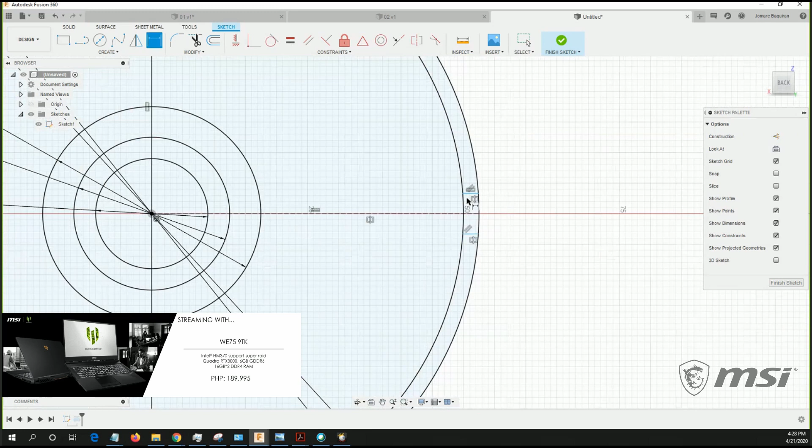Let's zoom out and define the distance of this gap. How about 5? Is that okay? What do you think? Comment down below. Okay, selecting finish sketch.

So it's turned on now. If ever, you can click this eyeball to turn the visibility on and off.

Let's revolve once more. Hit S, R, E, selecting revolve. This is the one we'll revolve, plus this. Let me activate the axis, selecting this line or sketch, the z-axis. Again, 360 degrees. There, now it has a gap.

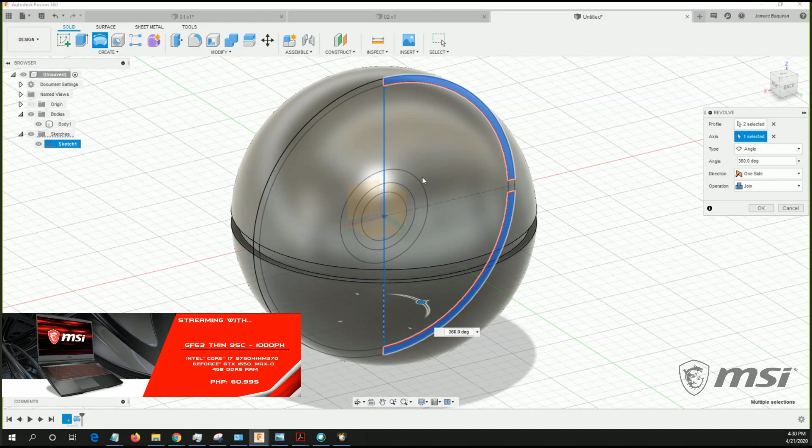Instead of join, be aware that initially, in revolve, we created one body, and these bodies we can combine or make Boolean operations by subtract. So this time, let's have this as a new body.

I'm going to hit OK. Notice, we created

additional 2 bodies. We can also stay organized by renaming them. To rename, left-click and left-click again. So this is the base, right? Let's name this as upper-shell. Left-click once more: lower shell.

Next, we need the hole here for our Pokemon ball. Let me introduce surfacing. I'm going to select this tab, Surface, and look for Extrude.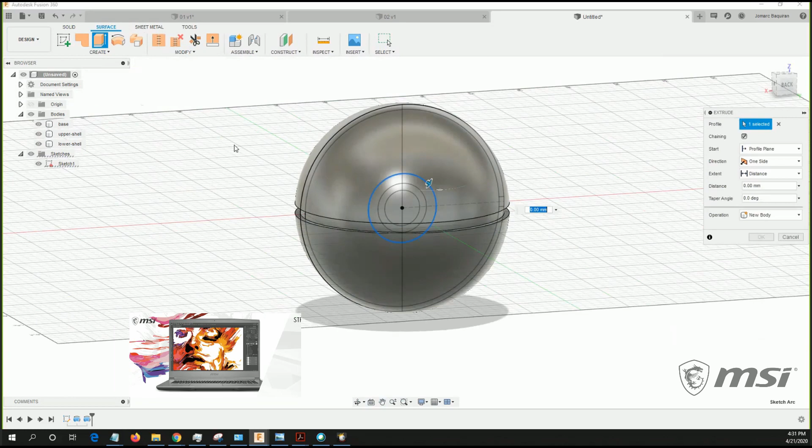Let's select this circular profile and pull this. The difference between a surface and a body: with a body, we can define its properties or materials, engineering properties. I can assign this as steel or plastic. But when it's a surface, it has no mass. It's just a shape or geometry.

This, we'll use as a cutting tool on our upper and lower shell. So let's let it pass through fully. Again, operation new body, hit OK. Notice the difference between the surface body and our regular solid body, it's in the color orange.

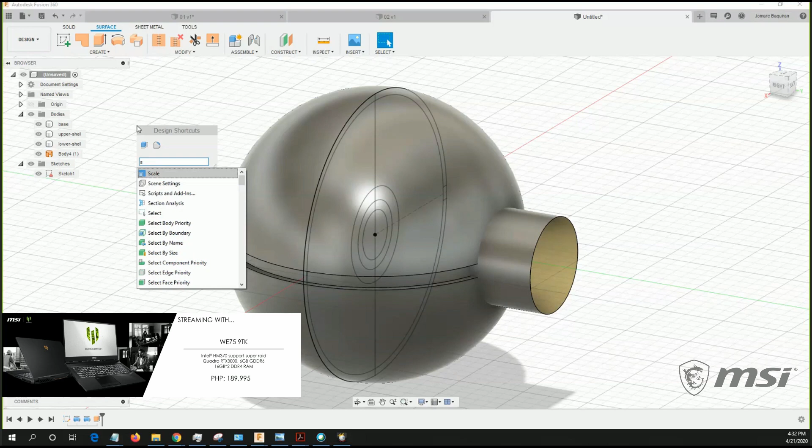Next, I'm going to select Combine, or I'll split this up. S for design shortcut, earlier it was sketch, now it's design, so again, it's contextual. S, S, P, and there, split body.

So the body we'll split is this one, the body to split, and this one, holding control just to make sure. Then, our splitting tool is our newly created surface body. So, good afternoon, Sir Jaime.

Welcome. So extend splitting tool is enabled. Notice we don't need it to cut or split the body over here, just this part, so I'm going to disable, untick, uncheck extend, and select OK.

Notice our things multiplied now. Yes, Realin, shiny. Later, we'll make it look nicer to demonstrate the power of rendering with Fusion 360.

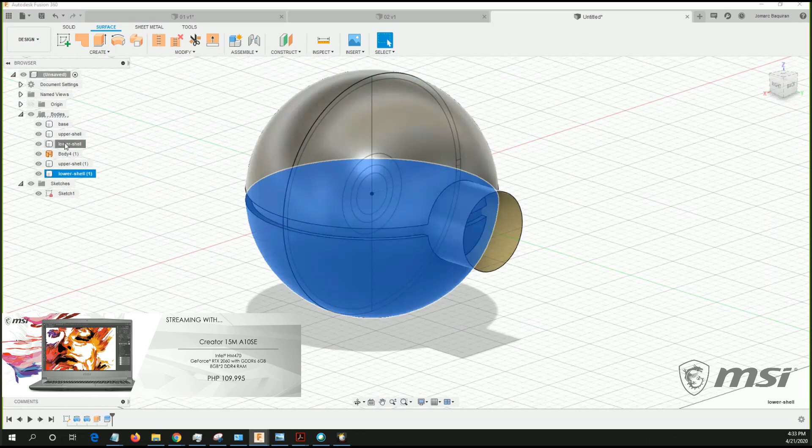I'm going to select these bodies to identify what should be removed. So this one is upper shell, and this one too. Instead of deleting them, the best practice is just removing them.

I'm going to select them, right-click, selecting Remove, because with remove, I can still call them back. There, it's back again when I move the marker. There, it came back. That's the advantage of remove instead of delete.

Because with delete, it's gone, we can't bring it back anymore. So this, lower shell, right-click, selecting remove. And this is just a helper anyway, we can remove it or simply turn off its visibility. To make it different, although we could also just select and turn this off. Okay, next, let's extrude this.

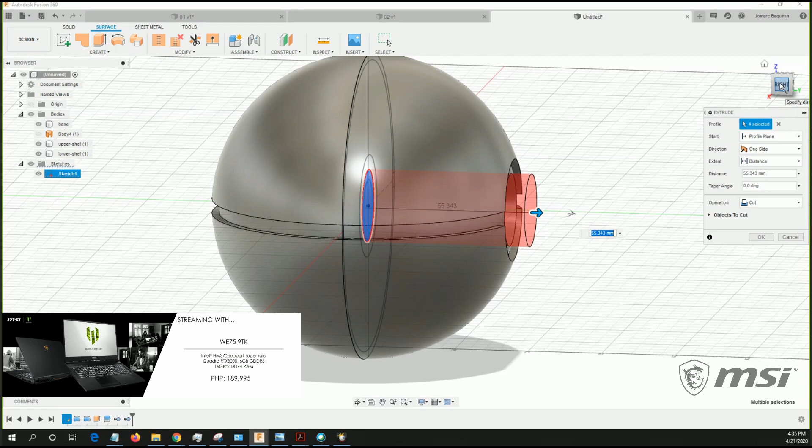This one and this one, these 4 profiles, pulling them. Let me head to right view. If you want this perfectly aligned to your target view, head to the view cube and select your desired view. So here, right, we want this, let's check, maybe up to here.

And to be exact, let's key in 50, or 51. In addition, another technique, I can perform simple mathematical operations here. I can key in 50, 50 plus 1, right?

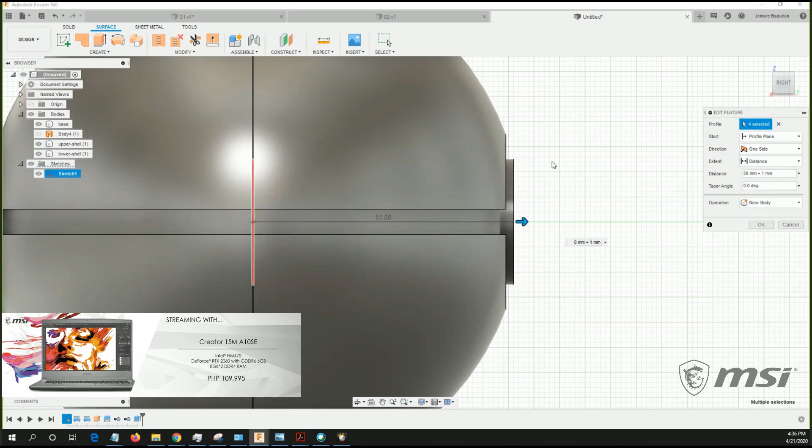Okay, so I made a mistake, right? I made a cut. So we should have this as new body. Okay.

Selecting okay. So this is what we'll call button 1. Next, our other button. So hitting E again, selecting these 2 profiles, moving this here, selecting right. So I want 53 and operation new body.

Okay, selecting okay. We're getting close now. Let's turn off the visibility of sketch 1. And from here, I have the option to combine these bodies as well. But for now, if we want to create a quick design to present to someone, like a prototype to show our boss or client, let's leave it like this.

Notice at this moment, we haven't applied any engineering properties yet. We haven't taken into consideration if this is going to be plastic injected or 3D printed.

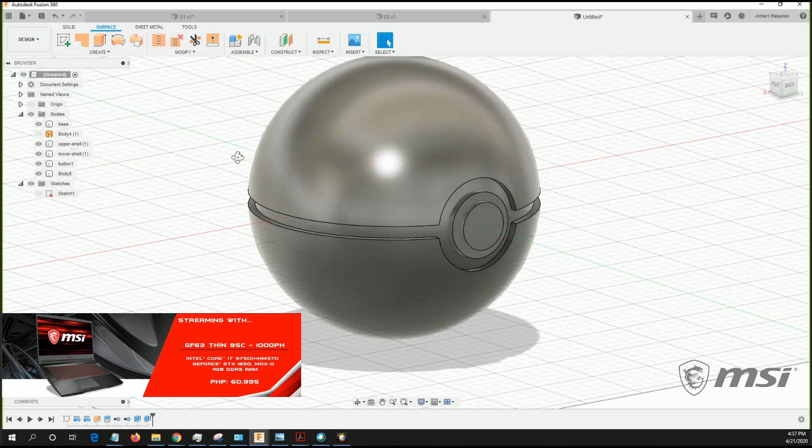So again, yes, you're right, this training alone isn't enough for you to become a master, but I assure you this beginners live training from MSI is something you'll keep coming back to. It's a great resource to all who are interested to learn Fusion 360.

Okay, so let's make this interesting. I'm going to head over to render.

And if you're curious, earlier shiny mentioned, right, the default material assigned to it is steel. That's the default. So I'm going to hit A.

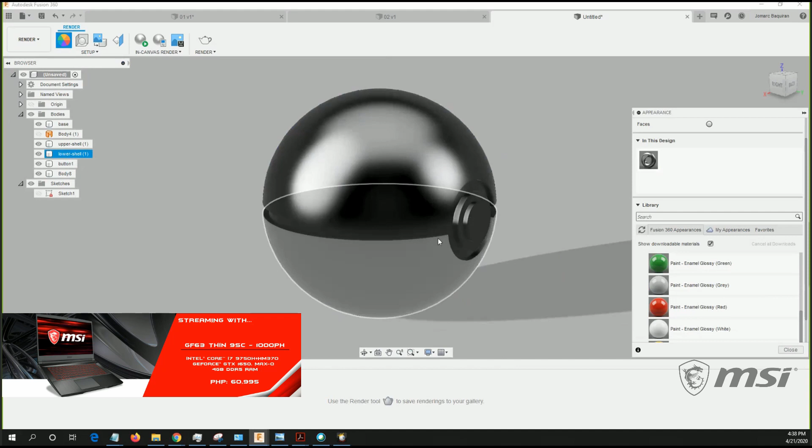That's the shortcut for appearance. Let's say this, let's paint this glossy, to match the look of our Pokemon ball. Okay, so this inner part we made earlier, the base, is black. Let's select paint enamel, glossy, dark gray. Wait, this one should be black. So left click and hold, drag and drop.

I can drag this here or here. Okay, so either of the two, then release. There, it's black now.

Okay, these two should be white, right? Let's head over to white. Drag and drop, drag and drop.

In addition, I can also select faces. So if you want a specific face to have that color, I can select face, activate this, and select, drag and drop to your target face.

Okay, so the upper shell needs to be red. So left click and hold, drag and drop. Okay, and this one too, white. So I can go here, drag and drop any of the two. Left click and hold, drag and drop.

So again, this is just a simple model. But what if this is a car, or even this tablet? There are so many components in it. If you disassemble it, the electronic components, there are thousands of them. And Fusion 360 too, right?

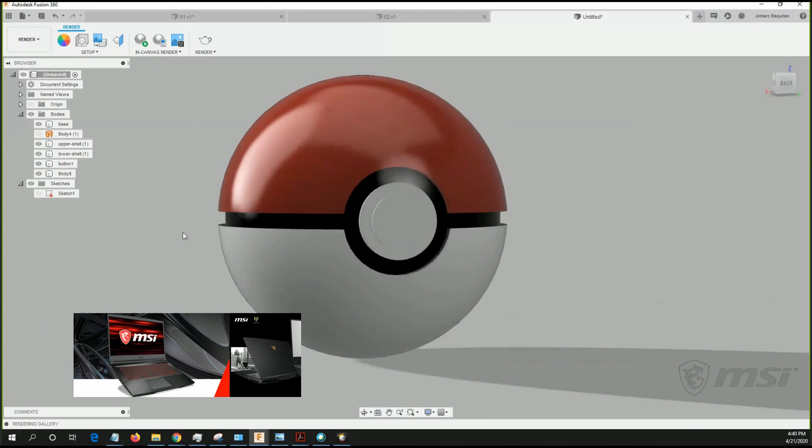And from that moment on, if that's the kind of product you're making, definitely you'll be requiring a more powerful machine. And the great one, my preferred option there...

There's sometimes confusion about gaming laptops. Maybe just tell your parent, if you're asking them to purchase a laptop, because they might misinterpret it as something you'll use for gaming. I recommend saying workstation, although it's more expensive. The games, just to add, were made using a workstation, not a gaming laptop, and the specs of a workstation are different. So if you have the budget, I highly recommend you purchase an MSI workstation or desktop instead of a gaming laptop.

Okay, so we have this now. To those who are familiar with render engines...

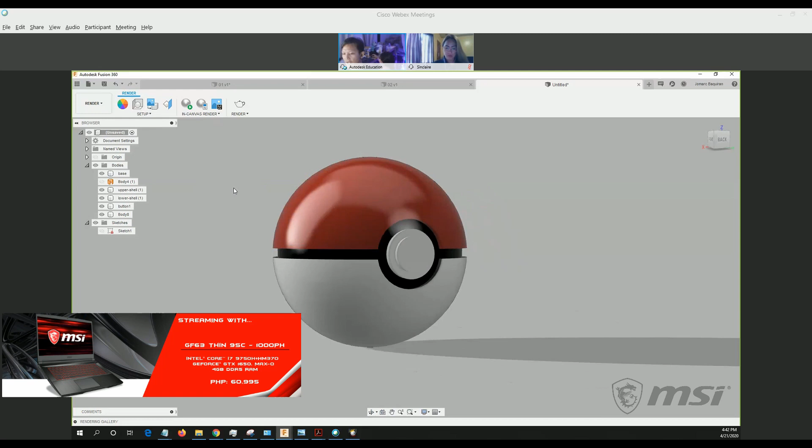How much is the license, boss? It's free, sir, as long as you're not earning more than $100,000 per year. So it's free for students and educators, and just to add, if you know an educational institution or your alma mater that wants to level up from AutoCAD - a lot of higher education still uses AutoCAD. Autodesk has many solutions when it comes to architecture, engineering, construction. There's specific software like BIM. So help us elevate our country and our academic institutions by using the software needed by the industry.

So I'm going to scene settings. Okay, let's make this more interesting. Flatten ground so it doesn't look like it's floating. Okay, I'm going to select environment.

In addition, notice here you can tweak settings. If you're familiar with photography, you can adjust the focal length, the exposure. If you want a blurry, dark background, you can adjust the depth of field. In addition, Autodesk has a default setting for this.

HDRI. Let's select the dry lake bed. Hopefully our internet is fast enough. You know, there's a lot of HDRI online where you can download these scenes. There's so many of them. So what I'm seeing here, I made a quick search.

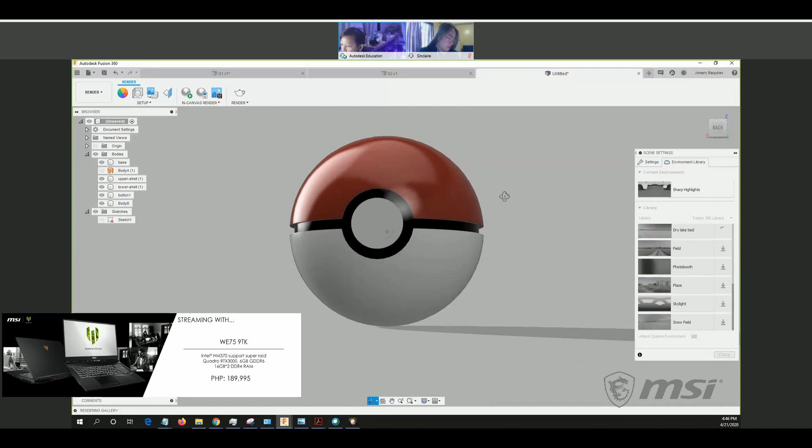Still no dry lake bed. So while waiting, let's put this in a specific pose. I'll go to scene settings and change the position. Notice the shadow - I can select position and rotate this. Okay, and we're good there, but let's check if it's downloaded yet - still nothing.

I can also change our ground. So selecting close, and I can select in-canvas render.

In-canvas rendering uses your local machine's processing power. If your computer is weak, I can have this rendered in the cloud.

Just select the Teapot. So this is the elapsed time, number of iterations. The engine behind this is ray tracing, which is the same as Arnold.

Arnold is another render engine, like V-Ray, by Autodesk. That's really powerful too.